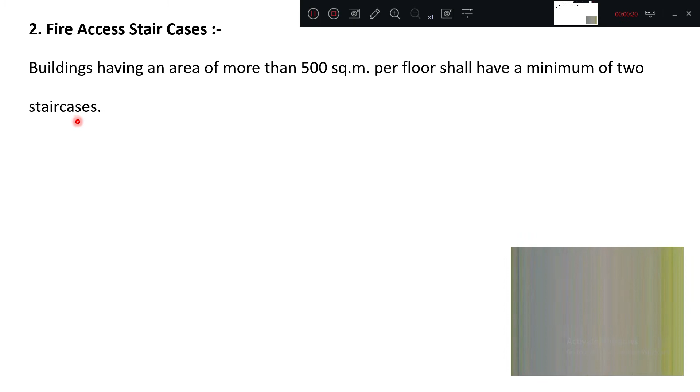Now in this next part, we can go for fire access staircase. What shall be the requirement for this one? Buildings having an area more than 500 square meter per floor shall have a minimum of 2 staircases. That is the requirement. It should have minimum 2 staircases.

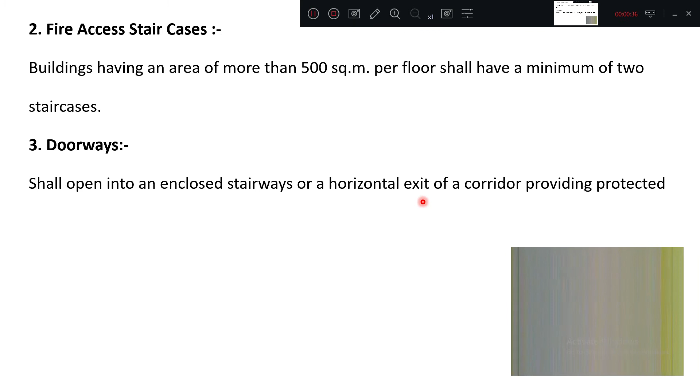Doorways. What about doorways? Shall open into an enclosed stairway. Means what? Whatever path you are taking, it should go and meet an enclosed stairway or a horizontal exit corridor, providing a protected means of egress. So whatever doorway you are choosing to exit, that shall not be less than 1 meter in width. Means the minimum width should be 1 meter, except in assembly buildings where it should be minimum 2 meters.

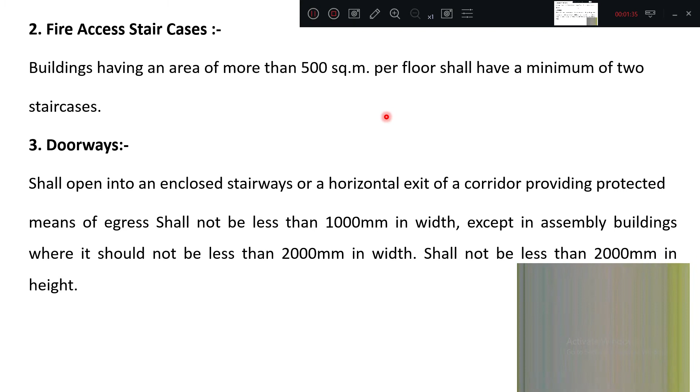So for normal buildings it is 1 meter, for assembly buildings it should be 2 meter, 2000 mm in width, and shall not be less than 2 meter in height. Whatever may be the case, minimum width is 1 meter or 2 meter, minimum height is 2 meter for all the cases. So staircase minimum 2 staircases, doorway minimum width 1 meter to 2 meter, minimum height 2 meter. These are the fire exit requirements as per NBC code book. Very important, as per NBC code book.

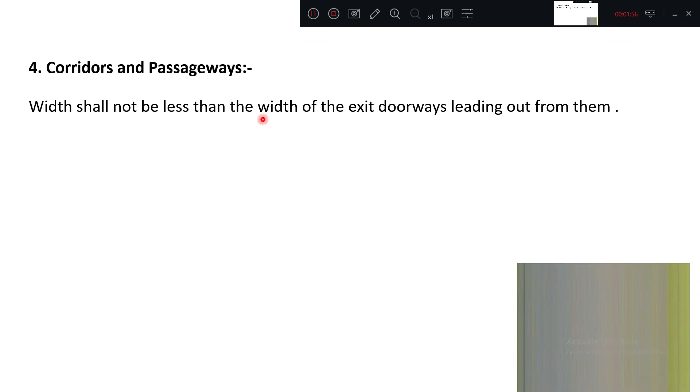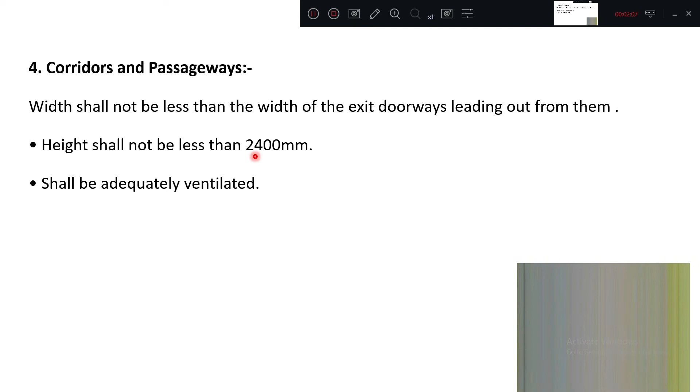Corridors and passageways. What shall be their width? Width shall not be less than the width of the doorway. From the doorway you are entering into the corridor, so both widths should be the same. It should not be less than the width of the doorway. That is the minimum. And height shall not be less than 2.4. Very important. Height shall not be less than 2.4 and shall be adequately ventilated.

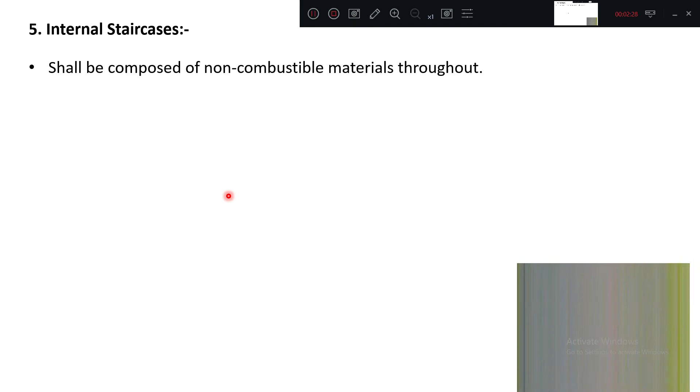Internal staircase. What about internal staircase? Shall be composed of non-combustible materials throughout. The external wall of the building shall constitute one of its sides. Means the staircase should be located nearer to the external wall, from where you can exit. Shall not be arranged around a lift shaft. Means the fire exit staircase should not be near the lift.

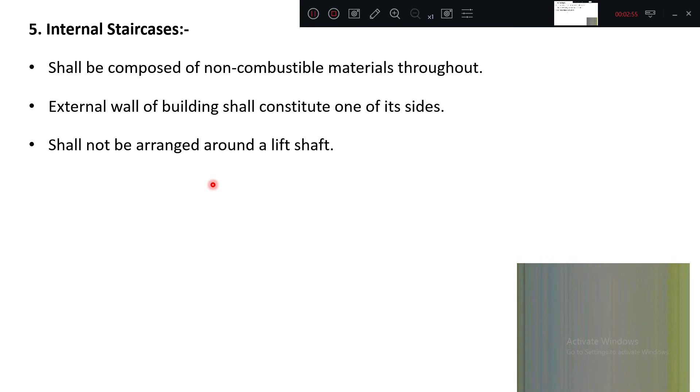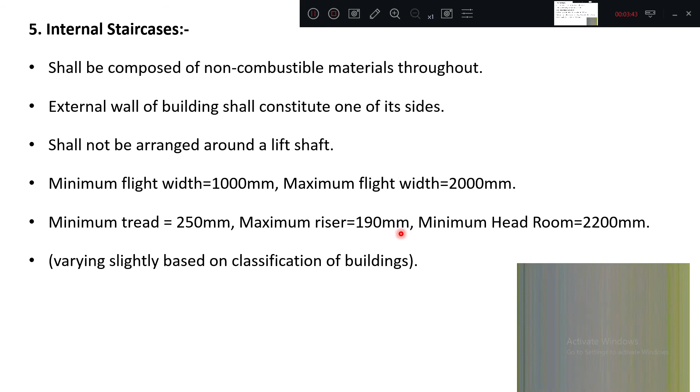The minimum flight width 1 meter, maximum flight width 2 meter. In the staircase you have landings, flights, stringer beams, everything. So you are providing the flight width minimum 1 meter, maximum 2 meter. Minimum tread 250 mm, maximum riser 190 mm, minimum headroom 2.2 meter. So all these staircase dimensions, riser, tread, headroom, are available in that one, varying slightly based on classification of the buildings. That means these dimensions may change a little bit depending upon the usage.

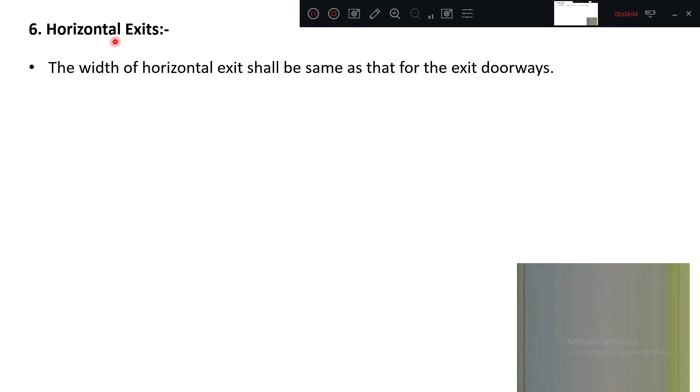Now next is horizontal exit. What shall be the requirement for horizontal exits? The width of horizontal exit shall be the same as for exit doorways. Where there is a difference in level, from one floor to another or one floor to basement, between connected areas of horizontal exit, ramps of not more than 1 in 10 slope shall be provided. That means steps should not be provided, ramps should be provided, and the slope should not cross 1 in 10.

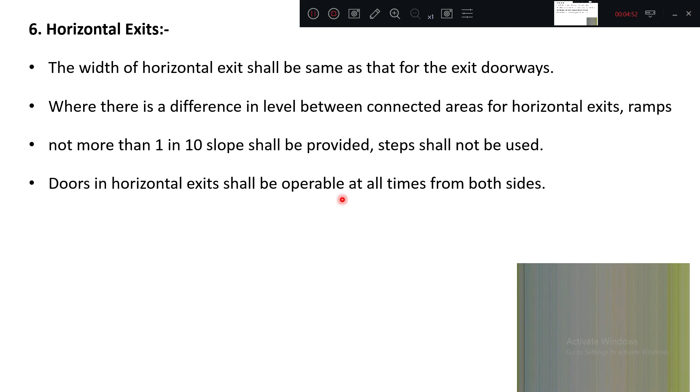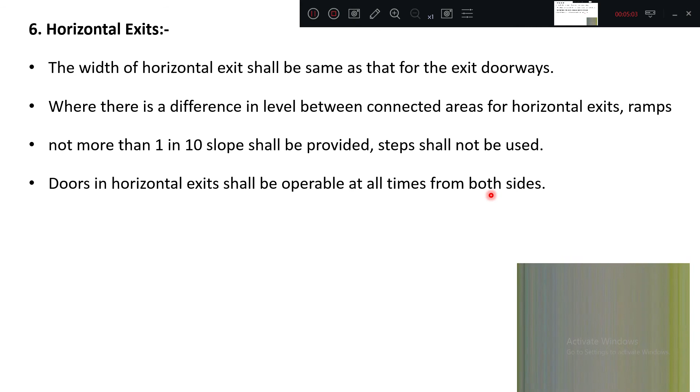So whenever there is a difference in level from one floor to another, the horizontal connecting exit shall consist of a ramp but not steps. Doors in horizontal exits shall be operable at all times from both sides. Means it should not close from one side. It is operable from both ways, at all times.

Refuge area. What do you mean by this one? Very high rise buildings. In some of the floors, some extra projected chajja from outside, or we call them balcony, where people will be more safe under fire accident. Okay, have you seen in the movies the public or the persons under fire, they just come and stay outside that window, outside that balcony. So those are generally called as a refuge area.

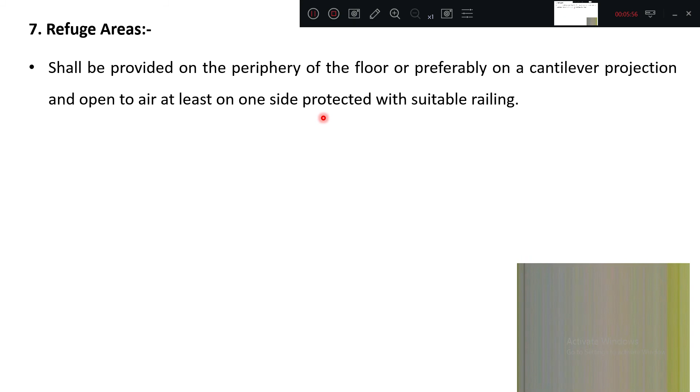These refuge areas are provided on the periphery of the floor, means outside of the building, but connected, or preferably as a cantilever projection. So what is that? Cantilever projection is nothing but balcony, no? And it is open to air. At least it is open to air on one side, protected with railings. Okay, so that is the very important term.

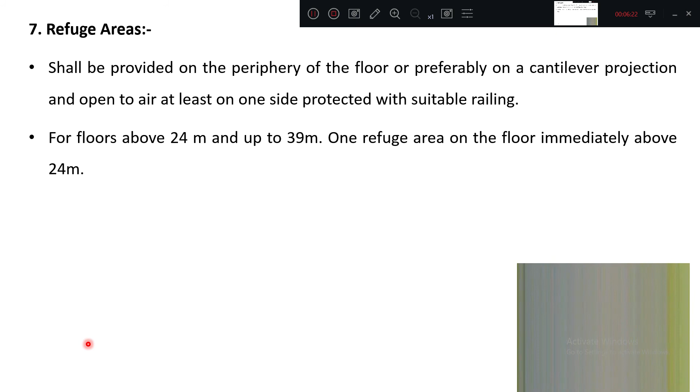Floors above 39 meter, one refuge area on the floor immediately above 39. So for every 15 meter there should be one refuge area. Means what? Up to 24 you can have one refuge area. After 24, above 39 meters, for every 15 meter, means every 3 floors or 5 floors, you should have one refuge area. That is the recommended number of refuge areas.

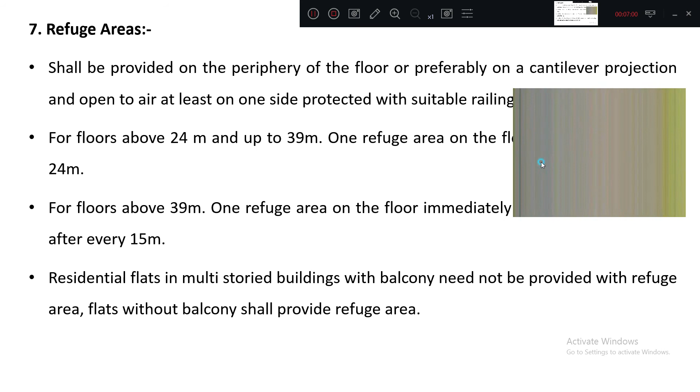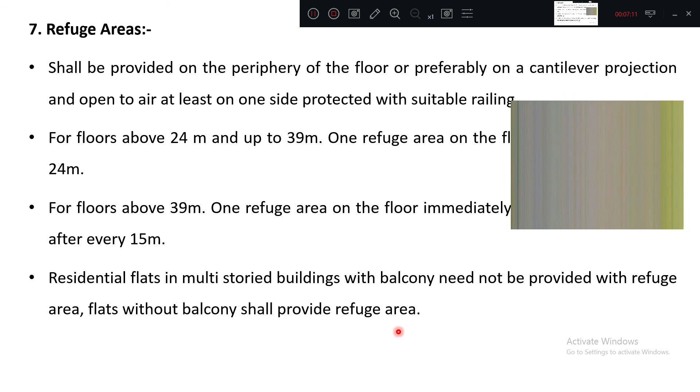Residential flats in multi-story buildings with balcony need not be provided with refuge area. Flats without balcony shall provide refuge area. What do you mean by this one? If any floor has a balcony for all the flats, then there is no need for refuge area. That serves as a refuge area only.

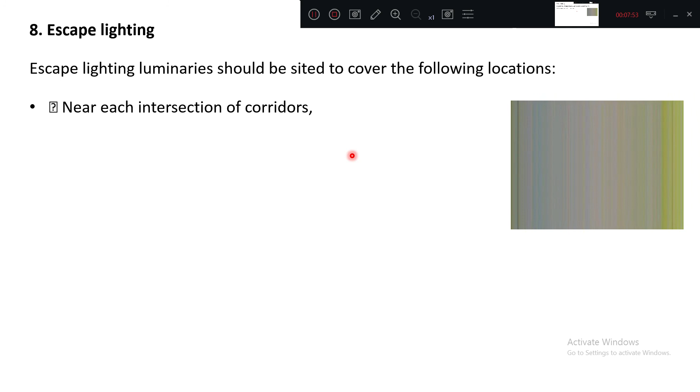Escape lighting. Escape lighting luminaries should be sited to cover the following locations. What do you mean by this one? Whenever fire is there, people run from one side to another side; they want to move outside. So at that time a proper lighting arrangement with separate electrical connection should be there. Near each intersection of corridors, at each exit door, near each change of direction in escape route.

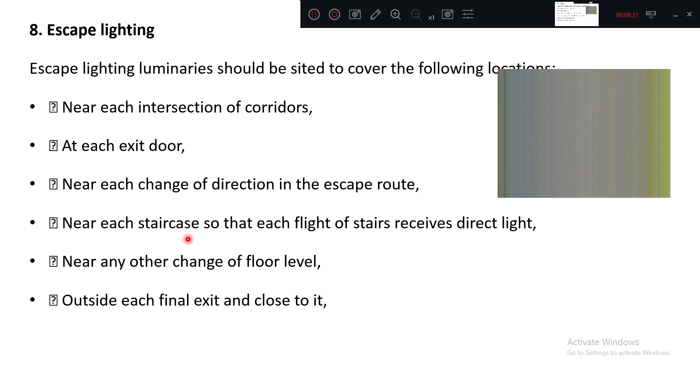Near each staircase, so that each flight of stairs receives direct lighting. Near any other change of floor level, outside of each final exit and close to it. Means what? In all these locations, wherever there is an intersection, exit door, change of direction, change in staircase portion, final exit, there should be escape lighting.

Also near each fire alarm call point. Means wherever fire alarm is there, directions are marked, there should be proper lighting arrangement. And also near the firefighting equipment you should provide it. So remember these things. These lighting arrangements are called escape lighting. Escape lighting should be provided for all these things in a multi-story building, and the electrical connection should be separate and treated as an emergency connection.

So why are we providing this? Can anyone name? During the emergency or fire accidents, all the electrical circuits are generally taken out. The KEB persons will come and disconnect, because if any short circuit happens, a lot of damage will take place. That is why a separate emergency line is made inside that building, which is generally connected to an automated generator system. So their power supply will come to this escape lighting and alarm system. So both ways it is possible.